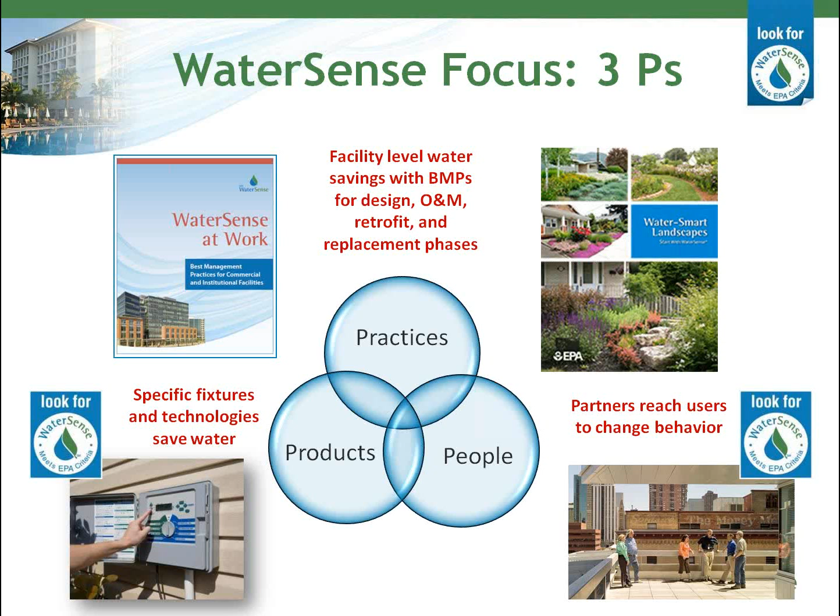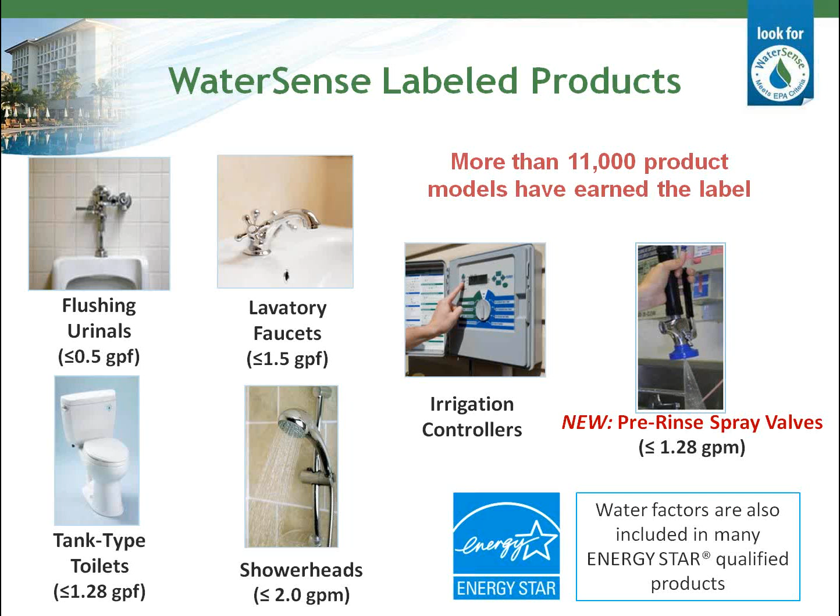Through 2012, WaterSense has helped consumers save a cumulative 487 billion gallons of water and over $8.9 billion in water and energy costs. We also work closely with our friends over at Energy Star, since water factors are included in many Energy Star specifications.

To help commercial and institutional facilities understand, manage, and reduce water use, we developed WaterSense at Work. This guidebook includes best management practices on water management planning, water use monitoring and education, sanitary fixtures and equipment, commercial kitchen equipment, outdoor water use, mechanical systems, laboratory and medical equipment, and on-site alternative sources of water.

Product and equipment-specific chapters in each of those main water use areas cover water-efficient operation and maintenance, retrofit, and replacement recommendations. WaterSense at Work also includes case studies that highlight the water, energy, and cost savings achieved by some of these commercial facilities who have implemented the BMPs.

Now that we've released the BMPs and there are labeled products available, WaterSense is beginning to work with some commercial sectors individually to promote water efficiency. This year we're focusing on the hotel sector.

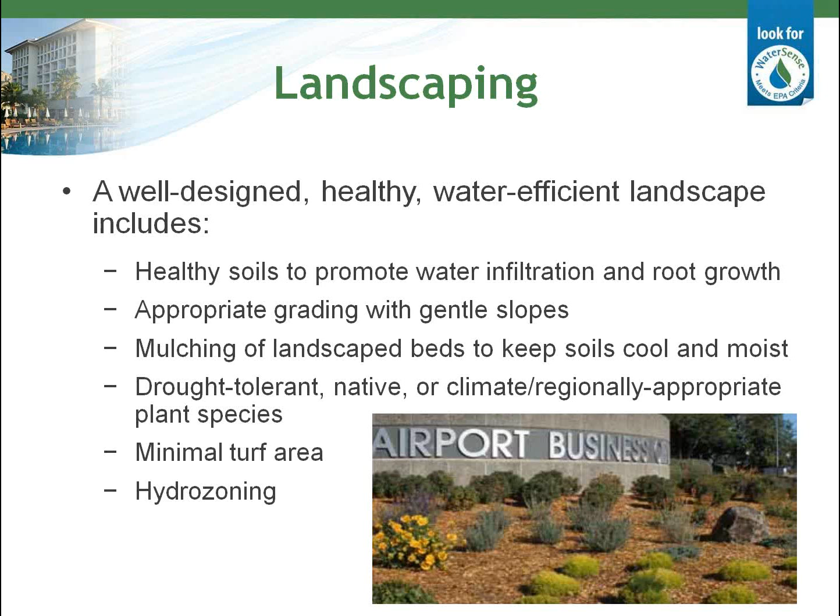A first step in ensuring you properly operate and maintain your landscape is to hire a landscape professional trained and certified in water-efficient or climate-appropriate landscaping. Service and maintenance agreements should incorporate your water efficiency goals and requirements.

Your soil is the foundation of your landscape. Healthy soils help develop deep plant root systems and allow water to properly infiltrate. Maintain good topsoil that captures precipitation as it falls and releases water back to plants over time. Poor or fast-draining soils, such as clay or sandy soils, can benefit from soil amendments to attain proper water holding capacity. Adding mulch to plant beds keeps soils cool and minimizes evaporation. Organic mulches can also add nutrients to the soil as they decompose.

If parts of your landscape undergo regular foot traffic, be sure to aerate those areas regularly to improve water infiltration.

You also want to maintain your existing plantings. Weed your landscape so that water is available for the decorative landscape that you actually want. Raise the blades on your mower to allow grass to grow longer, which promotes deeper root growth and more drought-resistant turf. Take advantage of shaded areas by applying less water to those spots.

If you have ornamental water features, or there are times of year when they can be turned off, do so to reduce evaporation losses. Recirculate any water flowing through fountains, ponds, waterfalls, or other water features as much as you can. And finally, make sure you sweep sidewalks, driveways, pool decks, and any other hardscapes instead of using water to wash these areas down.

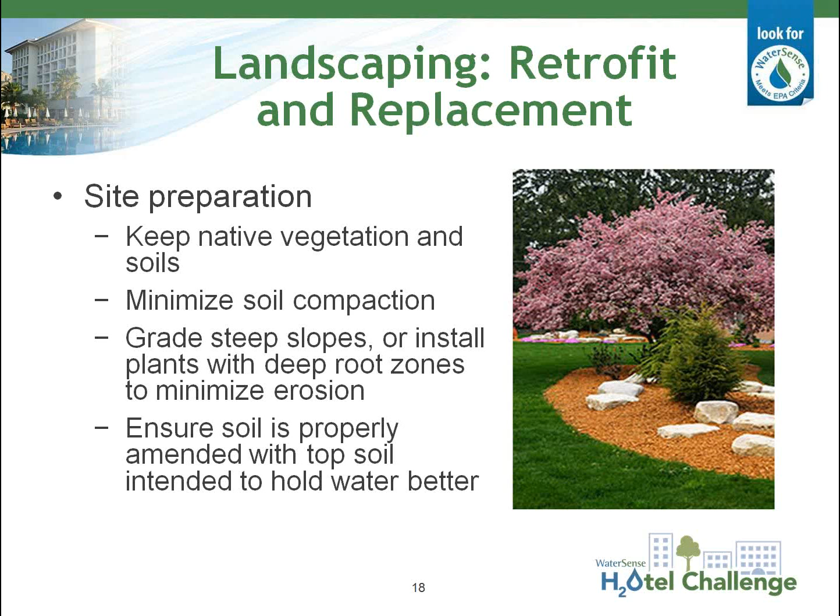If you use drought-tolerant and climate-appropriate plantings and materials, you may not need to apply as much supplemental irrigation to maintain your landscape quality. These plants can require less time and cost to maintain as well. Smaller turf areas can reduce resources and costs associated with watering, mowing, and fertilizing. Avoid strip grass entirely since it's difficult to water without overspray.

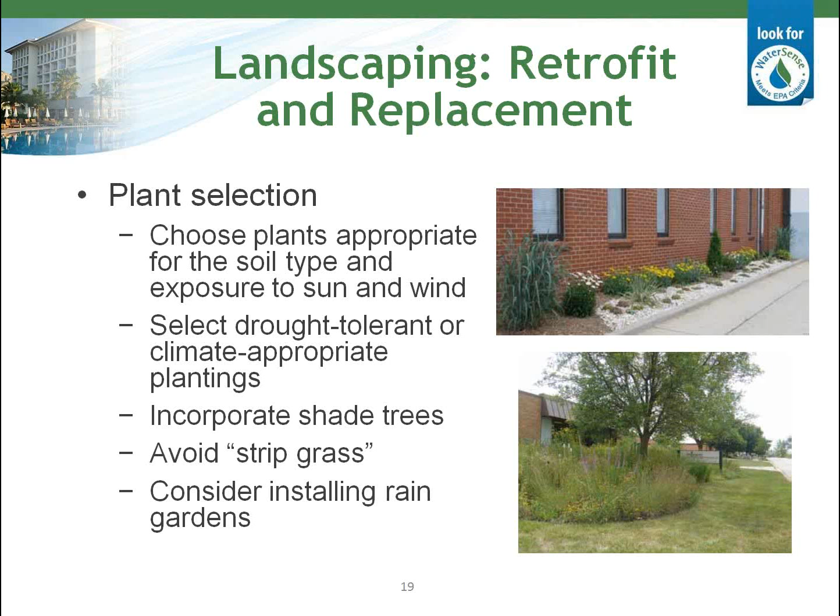You can also install shade trees, since shading reduces watering requirements of covered plants. Consider soil type, exposure to sun and wind, and grading when planting. Your landscape should be designed by grouping plants according to their water needs, to promote efficient irrigation in zones that do not require supplemental water. If you have a graded area, consider installing rain gardens to capture stormwater runoff appropriately.

In general, various studies have reported savings ranging from 18 to 50% from converting landscape plants with high water requirements to those with lower water requirements. Also keep in mind that a more water-efficient landscape can provide ancillary benefits by reducing the need for maintenance, fertilizer application, and fuel use. This wraps up our discussion on landscaping, but before we move on to discuss irrigation, we'd like to take a quick poll of the audience and take any questions you may have.

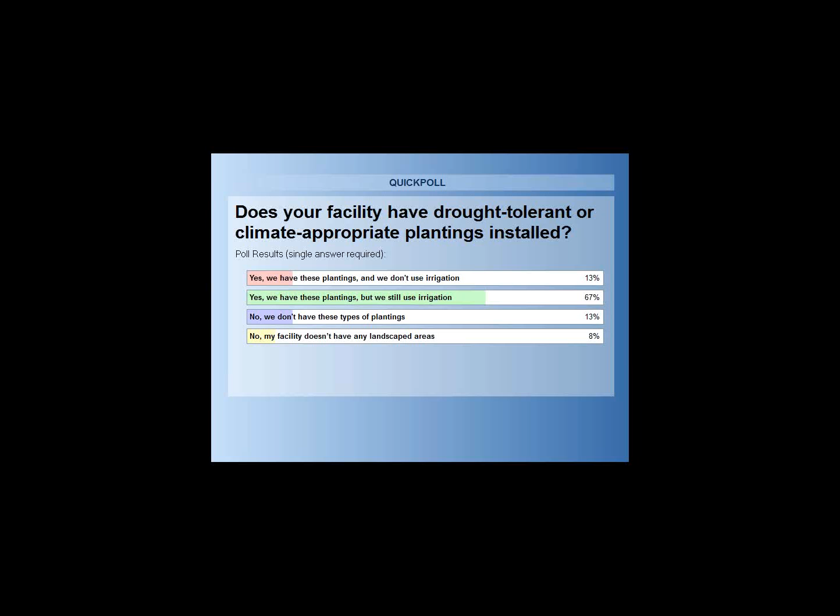Thanks, guys. Now that Tara has discussed how to ensure that your landscape is going to require the least supplemental water possible, let's discuss how to efficiently irrigate it when necessary. And it sounds like from the poll results, a lot of you are still irrigating, so I think this section will be really relevant to you.

Experts estimate that up to 50% of water used for irrigation is lost due to wind, evaporation, and overwatering. Poor irrigation system design, improper system installation, lack of maintenance, and improper scheduling can be the contributing factors to those water losses. The best practices we'll cover today will hopefully help you avoid some of these common issues.

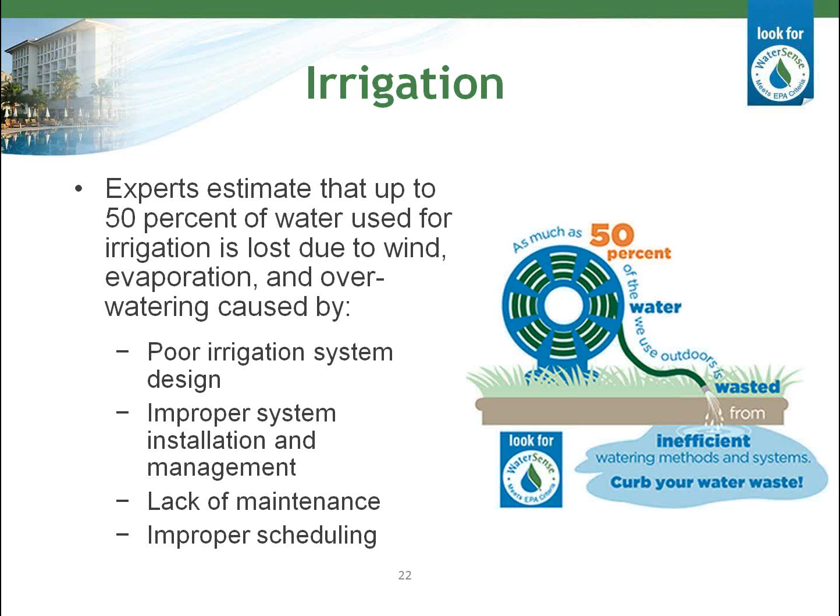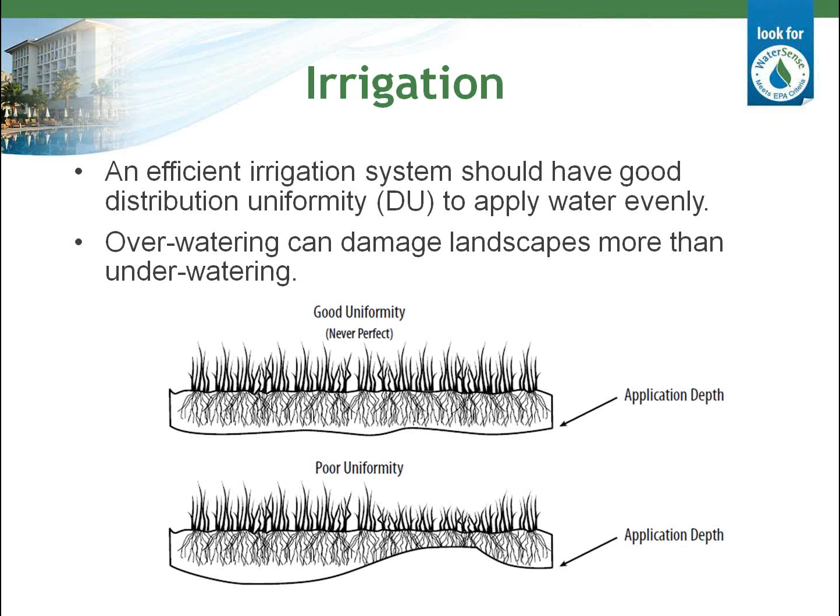On the bottom, the distribution uniformity is poor. Some parts of the landscape are receiving more water than others, and landscapes with poor DU are often watered to keep the driest spot green, over-irrigating the other areas. You may not realize that overwatering can damage landscapes even more than underwatering.

To best address irrigation water use, you may want to start by hiring a qualified irrigation professional. WaterSense labels certification programs which test irrigation professionals on water-efficient techniques and technologies. Hiring an irrigation professional certified through a labeled program can ensure that your irrigation system is designed, operated, and maintained with water efficiency in mind.

When hiring an irrigation professional, you'll want to consider which type of certified professional you may need for the job at hand. Designers can design a water-efficient irrigation system, creating zones with similar watering requirements, ensuring head-to-head coverage, and selecting the right type of spray device for each part of your landscape.

Installation and maintenance professionals, sometimes simply called irrigation contractors, may install the system that was laid out by the designer. They may also manage your system, performing tasks like weatherizing it for the off-season, checking for leaks and overspray upon startup, replacing broken heads throughout the season, setting your controller schedule and adjusting it, and other maintenance items.

Irrigation auditors audit irrigation systems, and your system can be audited after installation to ensure the installed system meets the design intent. You probably also want to ensure your system is audited periodically. Auditors will suggest ways to maximize your DU and point out needed areas of maintenance and schedule improvements that can help you.

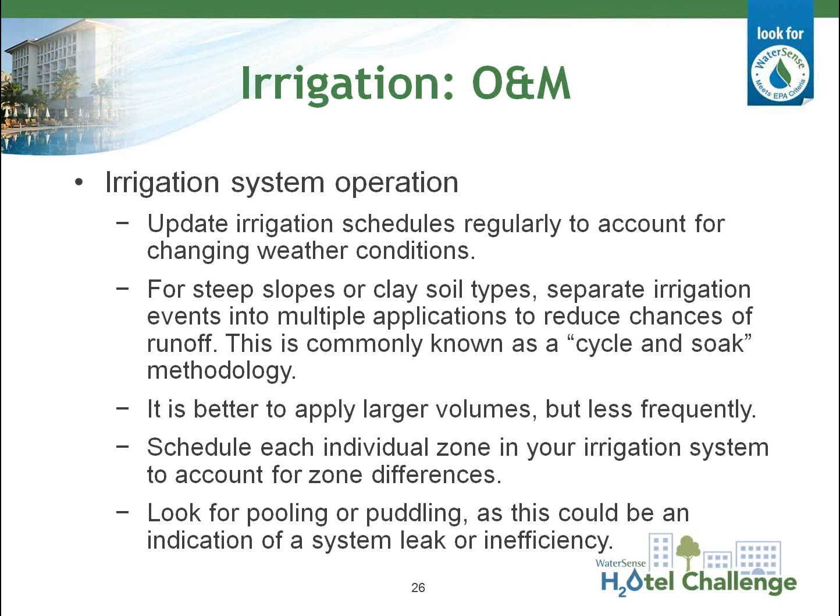Irrigation zones should be scheduled individually based on your zone's watering needs, and you'll want to consider exposure to sun, wind, plant type, soil type, and your sprinkler type when determining the schedule for each zone. If you see any pooling or puddling on your landscape, check for a leak in your irrigation system.

As I mentioned earlier, you should audit your irrigation system periodically, approximately every 3 to 4 years, to identify system deficiencies. Throughout the irrigation system, check for and fix broken sprinkler heads, spray that might be landing on hardscapes, and of course look for any leaks.

If you have water meters installed on your irrigation system specifically, you'll want to read them at least monthly and analyze water use trends. Your annual water use should form a bell curve with the highest irrigation use in the summer months, indicating that you're adjusting your schedule appropriately to account for seasonal climate changes. If you don't have a dedicated irrigation meter installed, you might want to install one, since you can't manage what you don't measure.

Now let's talk about ways to retrofit your existing system to reduce your irrigation water use. Since your irrigation schedule dictates your water use, you could first consider replacing your existing timer-based controllers with demand-based controllers.

Weather-based irrigation controllers adjust your irrigation schedule based on local weather factors. Soil moisture sensors and rain sensors will bypass irrigation when it isn't needed. And wind and freeze sensors will also override scheduled waterings if weather conditions aren't right.

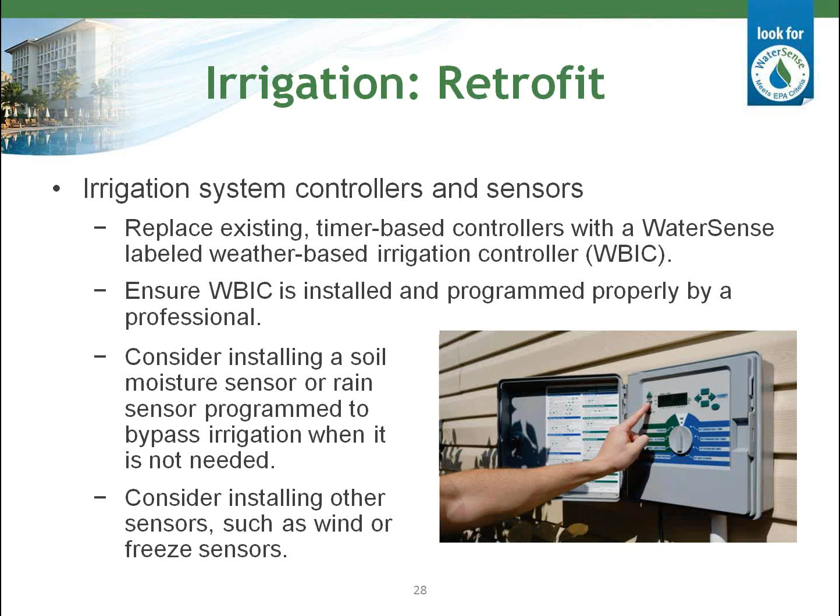Weather-based irrigation controllers are currently eligible for the WaterSense label, and WaterSense is working on a specification to label soil moisture sensors.

You can also optimize your irrigation system hardware to help you use less water. Consider installing drip irrigation around trees, shrubs, and plant beds. These emission devices deliver water at the root zone, so less water is lost to evaporation and wind.

You may also want to consider replacing your sprinkler heads with more efficient heads, like pressure-regulating heads and matched precipitation, or multi-trajectory rotating heads. And WaterSense is working on a specification for landscape irrigation sprinklers.

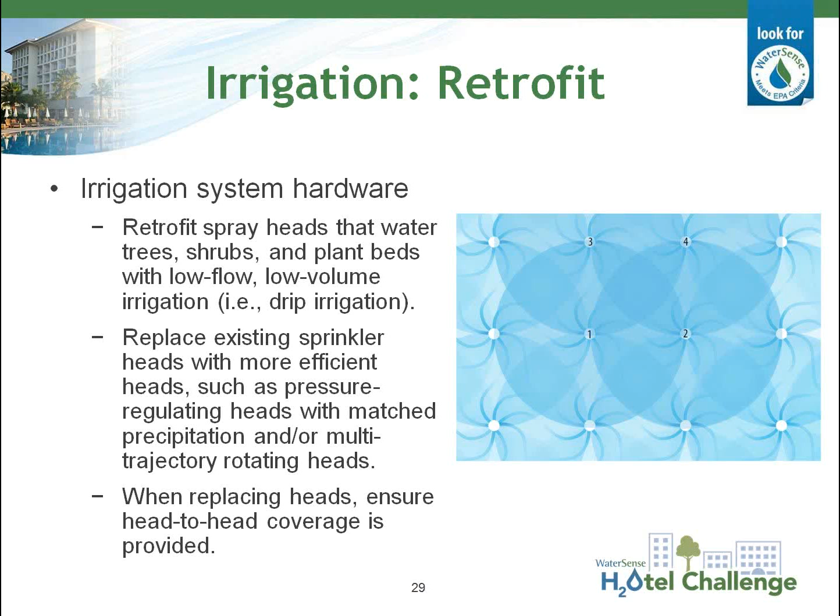If you do replace heads, make sure there's head-to-head coverage, that is, water from one spray head is reaching but not spraying past surrounding spray heads. This will help you improve your DU, and the image on this slide provides an illustration of this concept.

If you're thinking about replacing your system or installing a new system, you want to consider working with a certified irrigation professional. Throughout design, you want to aim for a DU of at least 65%, place plants with similar watering needs together, and consider other site conditions that affect watering needs.

You want to consider installing water-efficient emission devices, demand-based controllers, and other sensors. In addition, you could consider installing flow rate monitoring equipment, which can help interrupt irrigation if excess flow is detected. That can really help you avoid losing water to leaks.

If the system sees that there's excess water flowing, it can immediately cut that off, and you won't even have to see the pooling or puddling to make the decision to stop irrigating. If available and allowed by your local water codes, consider using alternative water sources such as reclaimed water for your landscape watering.

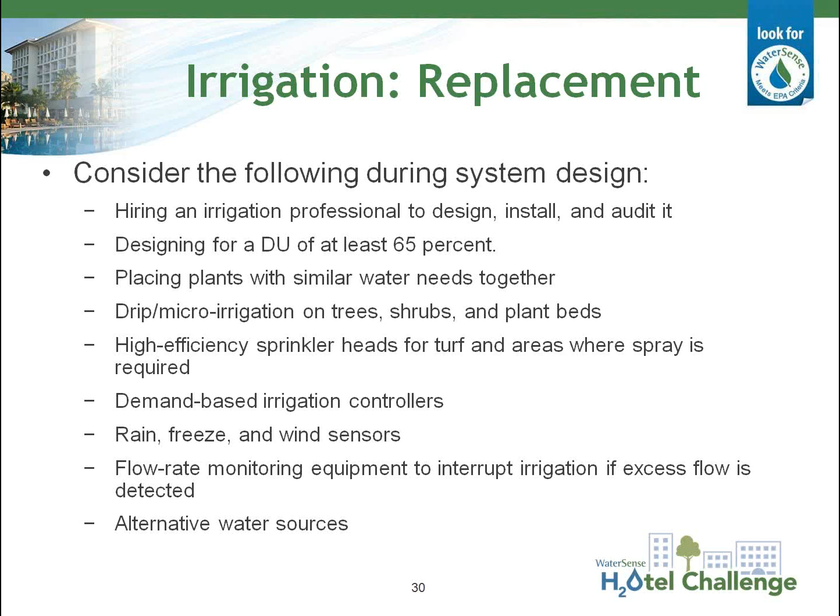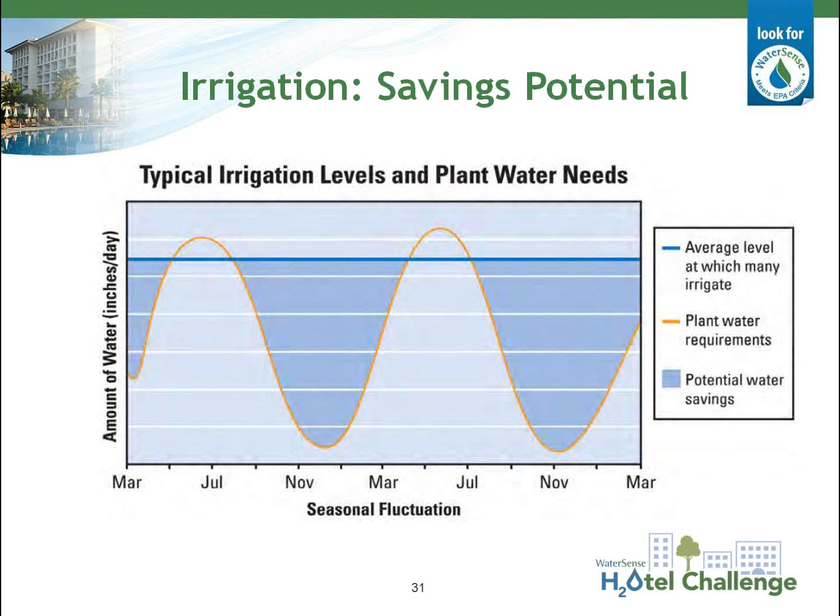If you adjust your schedule to account for plants' actual needs, you can save a significant amount of water, illustrated by that dark blue shaded area between the dark blue line, which is your set schedule, and the orange curve, which is your plant's needs.

Here are some savings you may see by replacing your system hardware. A properly installed WaterSense labeled weather-based irrigation controller may reduce your irrigation water use by 15%.

Using drip on trees, shrubs, and plant beds can use 50% less water than conventional sprinkler systems. And water-efficient sprinkler heads can reduce water use by as much as 30% compared to standard pop-ups.

Remember that if you replace components of your irrigation system, you should adjust your irrigation schedule for that zone to account for the changes.

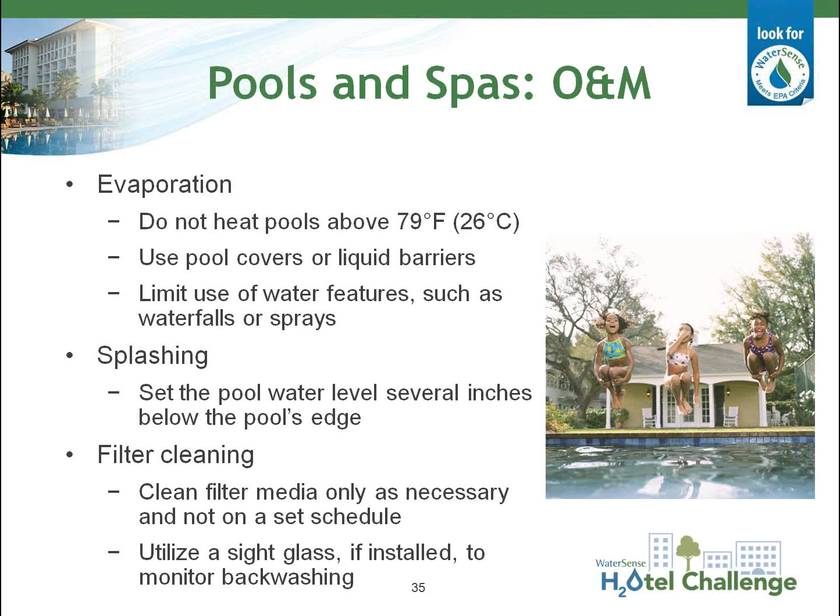To control mineral buildup, you want to maintain proper pH, alkalinity, and hardness levels in your pool water. This can avoid the need to drain your pool or add excess makeup water.

If you do have to drain your pool, only do a partial drain if you can, and consider reusing that drain water for other purposes, maybe like filling ornamental water features you may have.

To check for leaks, you want to actively monitor your pool's water level. If your pool loses more than 2 inches per week, or 3 inches if you're in a drier or more arid region of the country, that could be the sign of a leak.

And if you anticipate you might have a leak, or just as a good practice, you want to periodically inspect your pump seals, pipe joints, filtration system lines, pool liners, and any other areas around your pool or in the operational area where leaks may be common. Obviously repair any of those leaks as soon as they're identified, because they are really big water wasters.

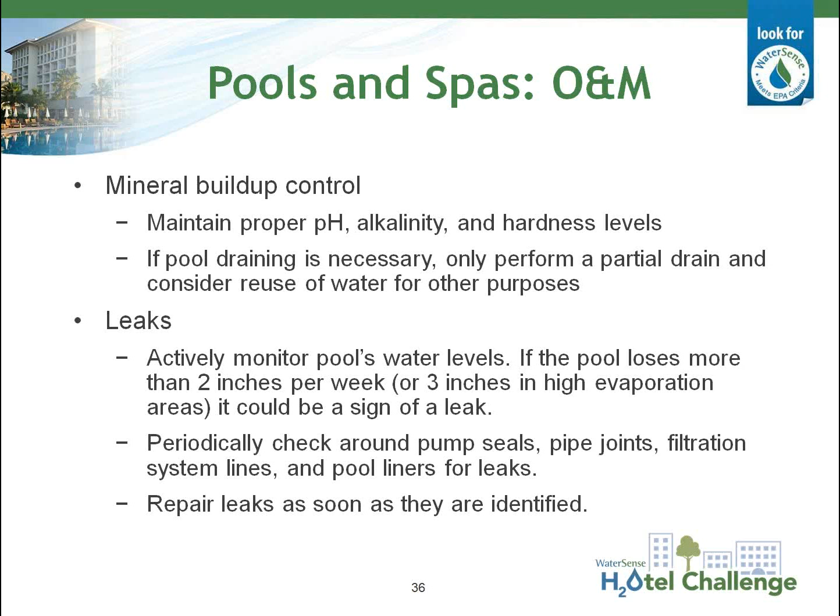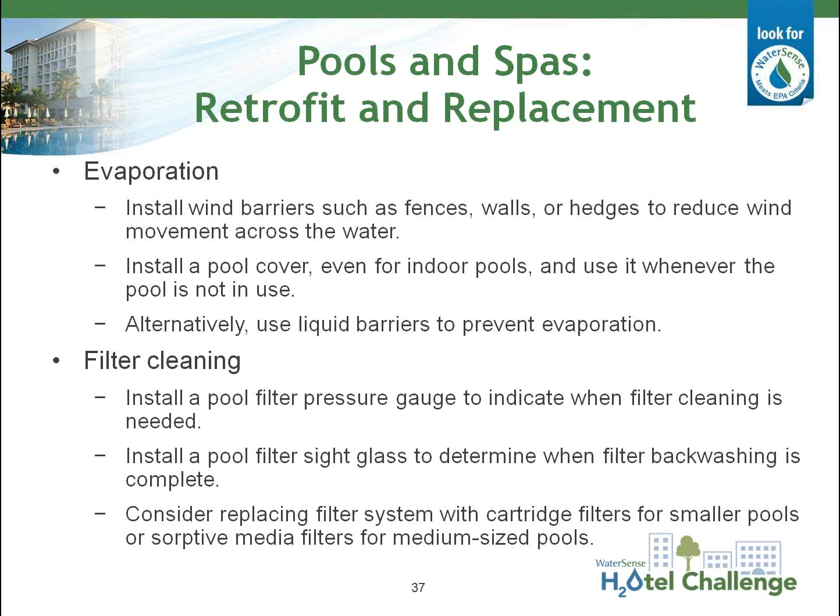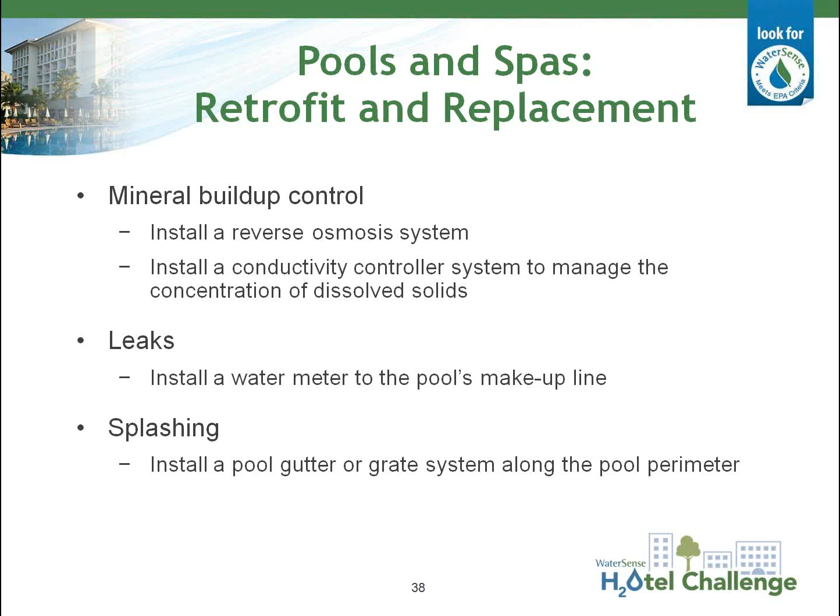It's hard to estimate savings for some of these practices, but in general, using physical pool covers can reduce evaporation losses by 30 to 50%, and liquid barriers can reduce it by 10 to 30%. In addition, replacing sand or sorptive media filters with cartridge filters, where appropriate, can save between 68 and 98% of backwash water. The details and stats backing up those numbers are located in our WaterSense at Work document.

Thanks, Holly. Now let's take a break to see if anyone has questions about the pool and spa material section. Another poll will also be showing up, asking: how does your pool facility use a pool cover when your pool is not in use?

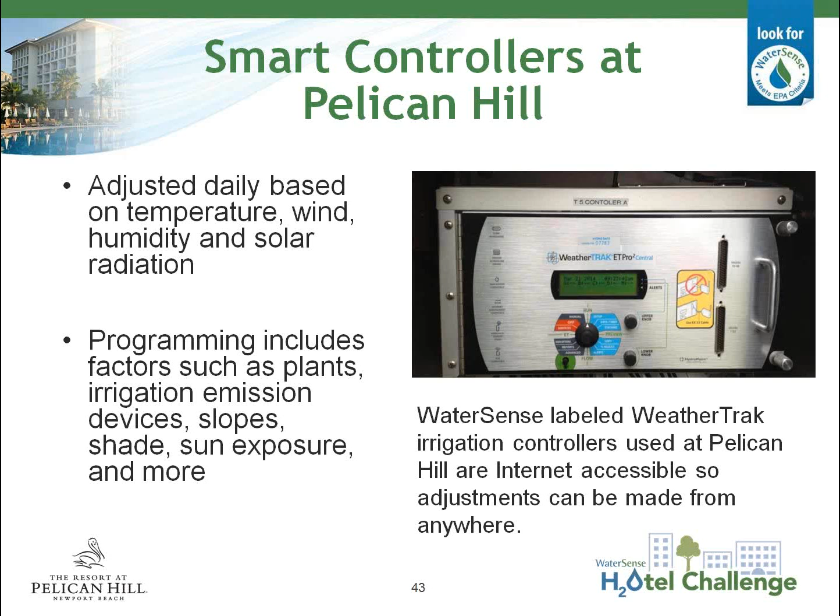Next is looking at post-construction water savings opportunities, because we have to remember water conservation and water management is really an endless horse race. Water used to be very plentiful and not very expensive, and it's getting scarce now and more expensive every day. So I think of water management as an endless horse race, something we have to continually improve. We completed construction in 2009 at Pelican Hill, but that doesn't mean we stop looking for opportunities to improve. The areas we saw as real low-hanging fruit, easy to change, were...

We decided to evaluate our irrigation. Technology continues to change and get better in irrigation, so we had to look for improvements we could make there. We had to look at plant conversions too. Sometimes you pick a drought-tolerant or perennial plant, and maybe because of soil conditions or other things you just couldn't determine, they're not doing as well. So we had to look at that as well.

Mulching practices are part of best management practices, and you have to evaluate, based on rain and other weather and foot traffic, how often to replenish your mulch. So that's something else you need to look at. And then, how often are you doing a preventative maintenance inspection? Regularity of this is really key. If you allow time to pass, things on your irrigation system can get out of adjustment, start to clog, and you can start to have problems. So you want to evaluate that as well.

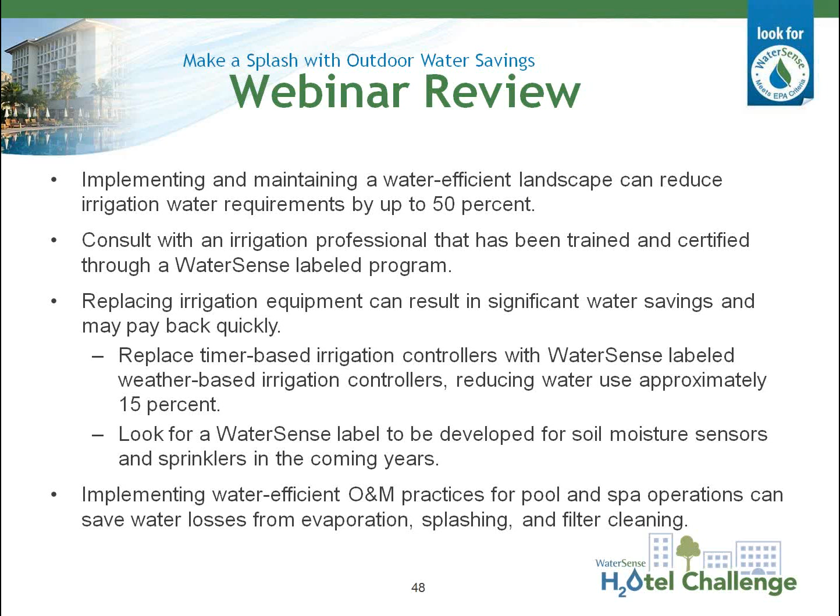Replacing a timer-based irrigation controller with WaterSense labeled weather-based irrigation controllers can reduce your water use by approximately 15%. And keep your eye out for future outdoor labeled products—we're working on specifications for soil moisture sensors and landscape irrigation sprinklers. Finally, you can reduce your water losses from evaporation, splashing, and filter cleaning fairly easily by implementing water efficient operation and maintenance practices for pools and spas.

So after all of this, what can you do right now? We wanted to give you some really basic things you could start using right now, just to get the ball rolling. You can add mulch and topsoil where appropriate on the landscape and aerate the high traffic areas to really increase your soil's water retention and reduce evaporation losses.

You can allow your turf grass to grow a little higher, promoting deeper root growth and more drought-resistant turf. The easiest way to reduce your water use for irrigation is to adjust your zone-by-zone schedules regularly to meet the plant's needs, and apply cycle and soak scheduling to steep slopes and clay soils, while watering other landscapes less frequently with more volume at each watering.

Also, you should check your sprinkler heads regularly to make sure they're aimed appropriately at the landscape instead of hardscapes or other areas. And it goes without saying that you should fix any broken heads that you find—no one likes to have a gigantic water wasting geyser, as I believe they're called.

We also encourage you, if you don't already have one, to install and read a water meter dedicated to the irrigation system—that really helps you measure and manage the system properly because you have that individual system separated out. Also, for pools, you can control the temperature and use your cover or another liquid barrier to reduce evaporation losses, especially if the pool is outdoors. And you can consider altering your filter backwash plan to only clean filters when needed.